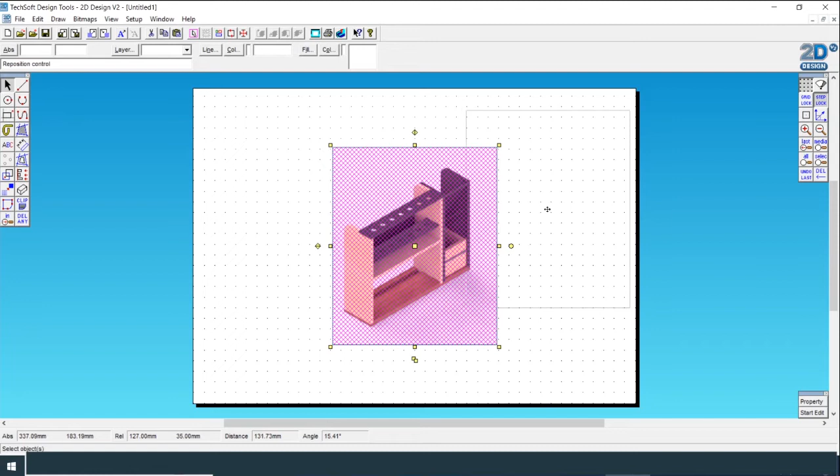Hi guys, in this lesson I will show you how to make holes for a pencil holder. So we look at this student's work, for example. Put this on one side. If I zoom in, you can see that this model has 7 holes. So 3, 4, 5, 6, 7.

Now in order to create this, we need to know the measurements from this side to this side and the width. So the length of this is 161 mil. So first step is click on Gridlock, make sure Gridlock is selected, and just draw a rectangular shape. Don't worry about the measurements at this moment of time.

Then we use a contour, so the 6th one down, click hold, and the 3rd one in. Click, type in the measurements 161, click OK. If you click close to the line, you'll offset the line 161 mil.

Double click on the contour, set that to 30 mil, click on OK. Click close to the line and you will have a line 30 mil offset from this line. Click on the del button, keep hold of it, click on the second delete button and delete the intersecting lines or the lines that you don't want. If I use this button, it will delete the whole shape. So you go back once, click on del and delete the lines that I don't require.

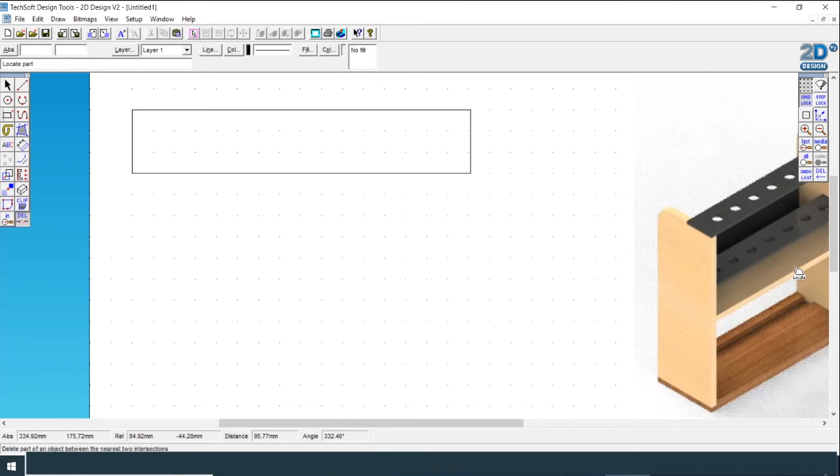So I need to make, in this example, 7 holes which are 10 millimeters in diameter. So if I click on my circle tool, double click on this, I can set my radius to 5 mil, which will give me a diameter of 10 mil. So click. Now remember the measurements for this.

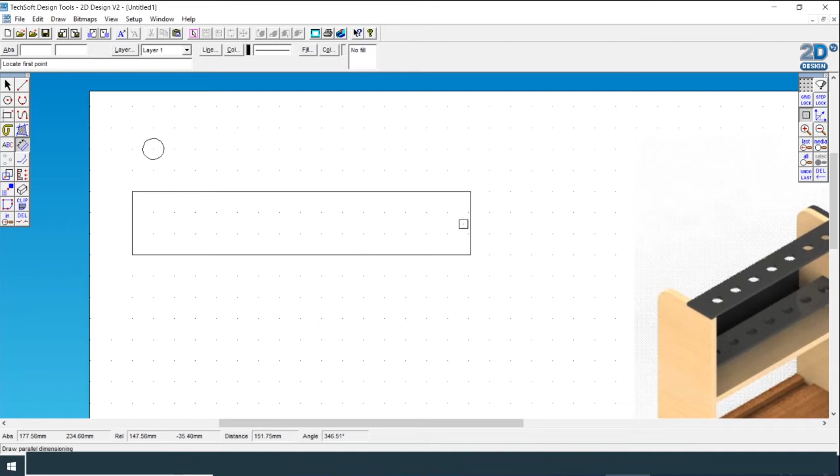If I click on my dimension tool, click off Gridlock, use the attach tool, double click an end point, click on this end point, click on the end point. That should be 161, and this is 30 mil. So 161 divided by 7 equals 23 millimeters. So the space between each hole needs to be 23 millimeters.

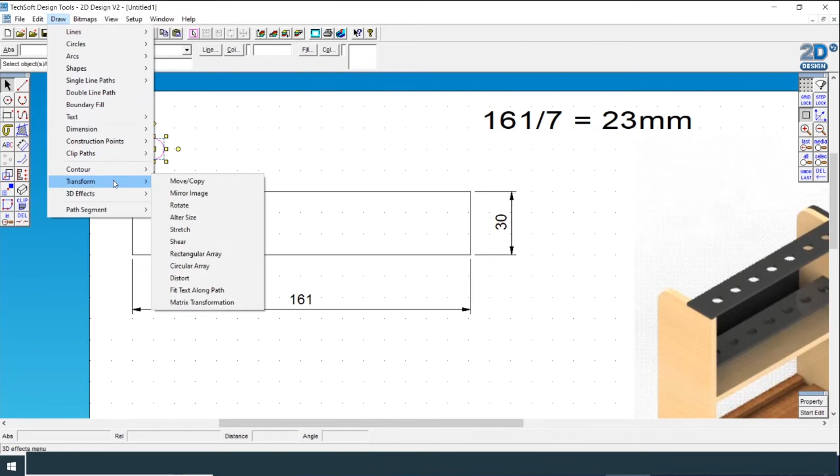So click on the circle. Now you can either draw this or repeat the pattern. The quickest way to do this is click on draw, transform, rectangular array. This is a bit of trial and error. So in this example I need 7 columns, 7 holes, 1 row. The X spacing needs to be 23. Don't need to worry about the Y spacing because I've only got 1 row.

And click on OK, and there you go. I've got 7 holes, distance of 23 mil. So I could check the distance if I click on... Actually, that really wouldn't work.

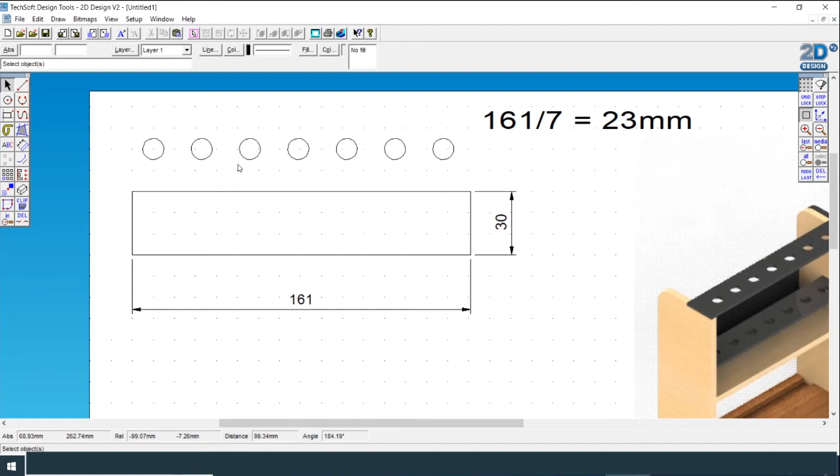Now to put these circles in the middle of this shape, I need to click on my line tool, double click on the attach, click on midpoint. So I need to create a center line. So if I click close to this line, it'll click onto the center. So click on this line, it attaches to the center.

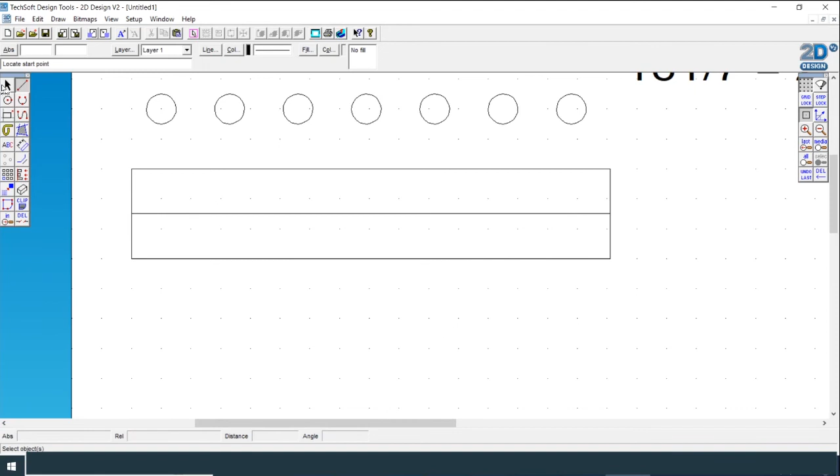Then I can use my selection tool, highlight this shape, and then if I drag the shape from the middle, come closest to the line, it should automatically select the middle of this line. That's because I've used the attach tool which says midpoint. Click on OK, and there you go guys. So I've got 7 circles in the middle of the shape. Then I delete the line that I don't want.

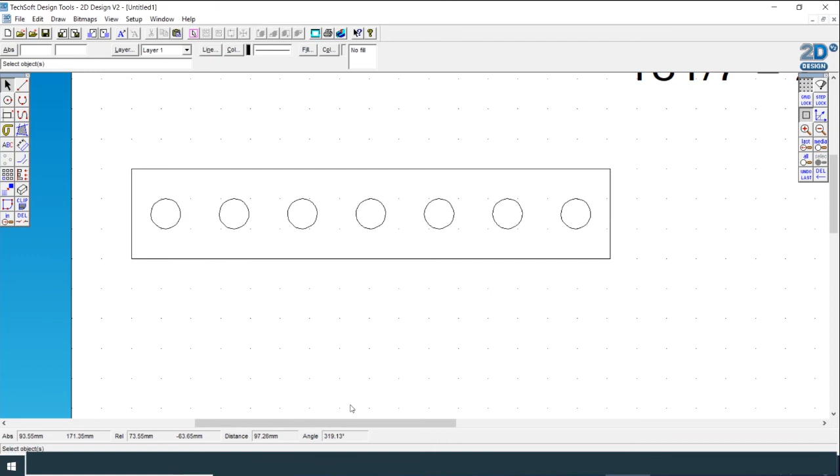Now if I wanted to create a radius, in this example this is straight, so no radius is required. But if you wanted to create a radius, click on the arc tool, go to the last one, and then you can change this. So if I click 5 mil, I'll create a 5 mil radius. If I double click this, 10 mil, and you can see the difference. Double click, 20 mil, right, and I say 3 mil.